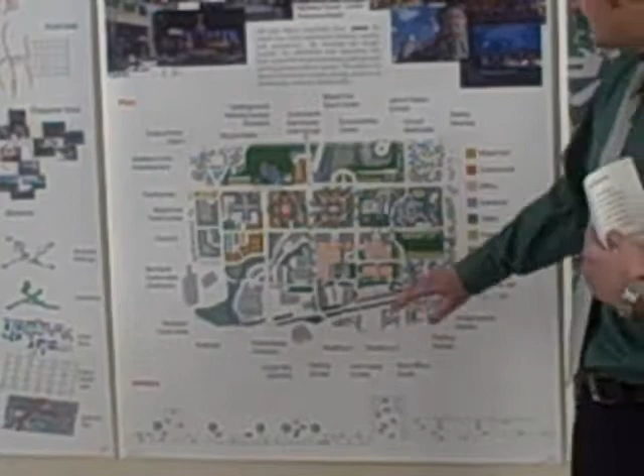Alright, so this is the plan we came up with here. The fundamental idea is to push the Red Bank Expressway under the neighborhood scaled street grid.

Starting with the program for our design, we located MedPace back here to the south, reutilizing NuTone Building 7 as a parking structure.

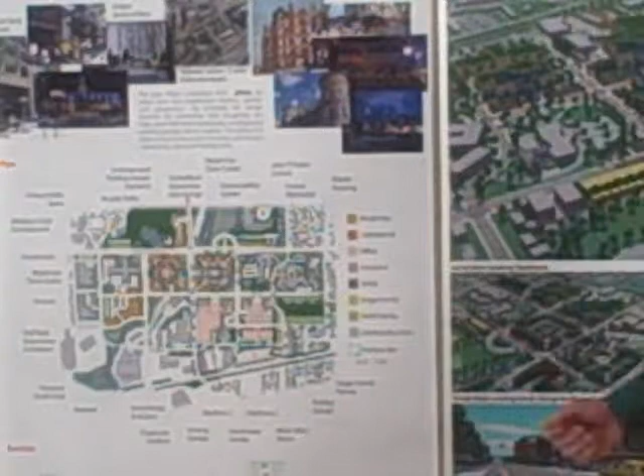Again, pushing the pedestrian-friendly aspect of our plan, these two blocks here in the center that bridge the expressway are actually pedestrian-only blocks. The only car-oriented anything on these blocks would be little roundabouts to pick up and drop off people who are going there to shop or what have you. These two pedestrian-only blocks are heavily mixed use.

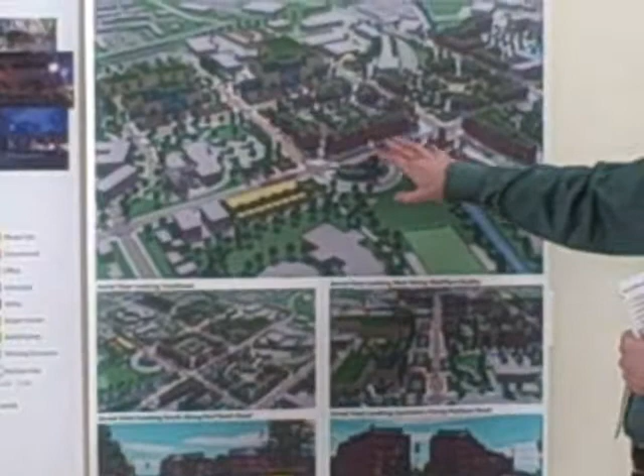We envision the first level as being all glass, meaning retail, bars, restaurants, that kind of street level activity. The several floors above, the brick facade, would be either apartments or office space that goes up into the structure. And then the top floor, which is mostly glass, would be penthouse condos that can utilize the green roofs as kind of backyards.

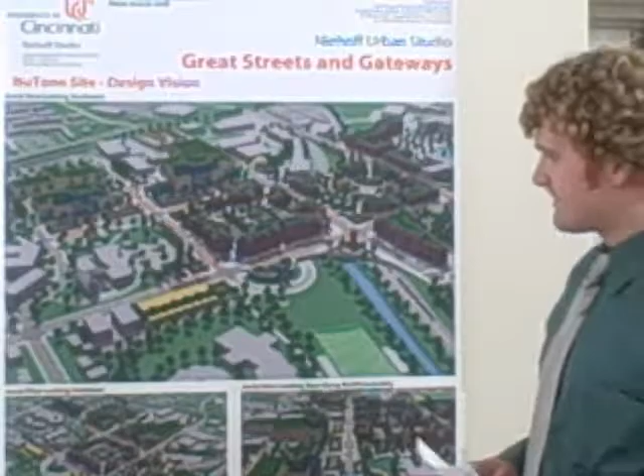Pushing on towards the periphery, we've got a couple banks of townhomes along Madison Road to increase the density along there and increase the street activity. We've got a neighborhood center for sustainability and green technologies, basically to educate the public on what's out there and how you can use it and implement it into future designs.

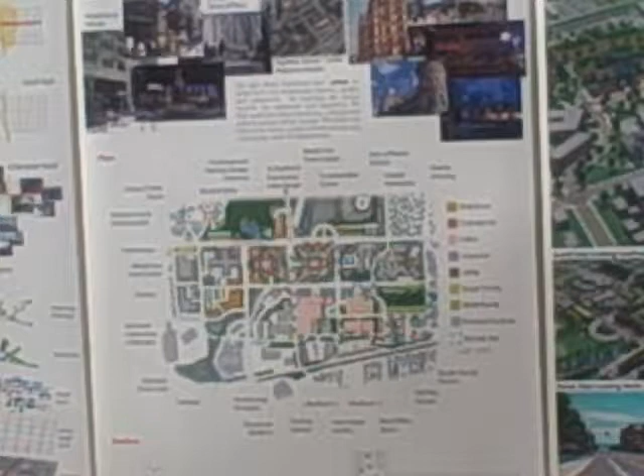Under this entire block here, under the eastern MedPace building, and then under much of this western block here, there's one level of structured parking, and by doing this we can achieve over 2,200 parking spaces without any parking besides on-street parking throughout the site. So what this has done is allowed us to create this pedestrian atmosphere with the parking it needs, but the parking's out of sight.

To address some of the issues that came up about the parking underneath throughout the zone here, there are 20 skylights—you can see them a little better in some of the renderings—some up to 800 square feet in size, that would let natural light down into the parking area and also let some air ventilate, which is a big concern in tunnels and structured parking and that sort.

And then to go along with this large structured parking and all that, we've actually included a small intermodal facility along the railroad track, which could take either containerized goods, or part of the thought was that with all the construction that would be involved here, you could bring in a lot of precast beams and pillars and reduce the amount of actual construction on site, where it'd just be bringing the pieces in and putting them in place.

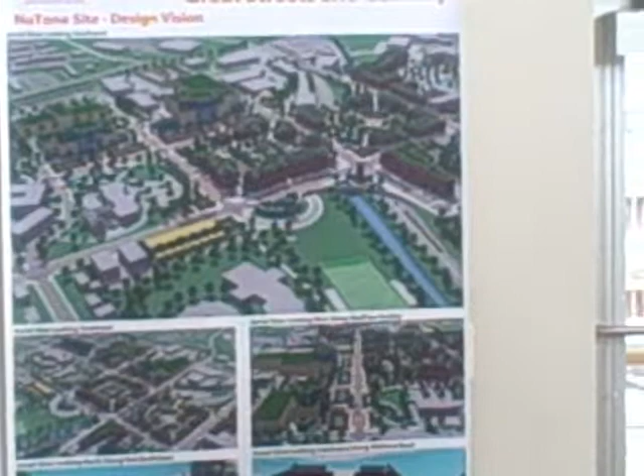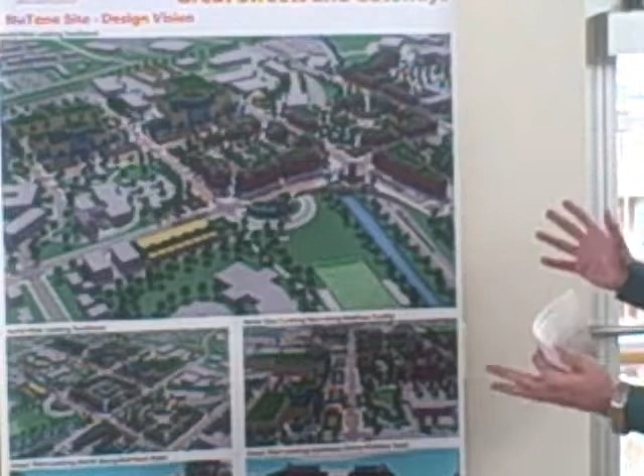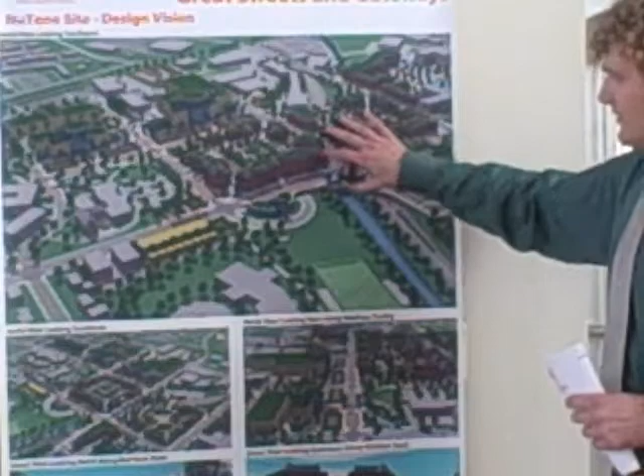Getting out of the renderings, this is the view southwest, Red Bank Expressway going through, Madison Road goes over it. We tried to give it some sort of cohesive style, so it would really have that sense of place—a monumental clock tower there at the intersection to emphasize that this is the core of our plan, with the green space going through to the forest here. We turned it into a park, again getting people into nature throughout our site.

View southwest. This is the streetscape along the front of MedPace with some P&G inspired trellis gardens out front, and we've got two street views there. And then, if I can direct your attention over here, we've put together a little animation to go with our design.